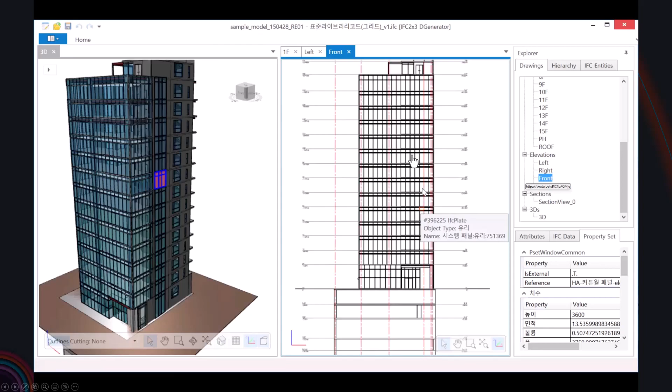I've done work with BricsCAD to think about how you would automate this in the future, such that you have view plan types—so for this floor, make 15 kinds of drawings and help me automate their setup. Things like object replacement: instead of putting the 2D representation of a fire extinguisher directly, everybody realizes that in a life safety plan a fire extinguisher is a symbol, or especially in an egress plan near an elevator it's super abstract. Don't put that in the content, make that a mapping that can be held externally.

So learning from that, it's definitely possible to take a multi-representation approach. Here's a 15-story building—you'd call these the A100s in the US market, the 1/8 or 1/16 level plans. These especially should be automatable completely at this point, such that for each of these levels you can say I need this kind of reflected ceiling, I need this kind of floor plan, and generate 50 different kinds of views: life safety, power, electric, layout, and so forth.

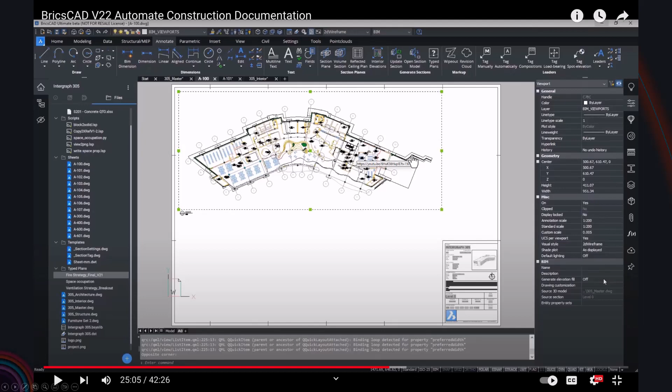Certainly not everything is perfect and automatable in the work I've done with BricsCAD, but we have other examples where people are looking at different efforts. To me, this is a really fruitful space to spend our time because it frees up where we can produce work. So if you can get data into a standard format, you can work in any number of tools.

So this is another example from Graebert. They're making a set of tools that do drawing automation out of Revit and IFC. This happens to be IFC, but basically a BIM sort of drawing approach where the drawings are abstracted from the model, but you're not making dumb drawings. You're making data-rich entities that are linked back to the drawing representation, which is how all the major BIM tools work today.

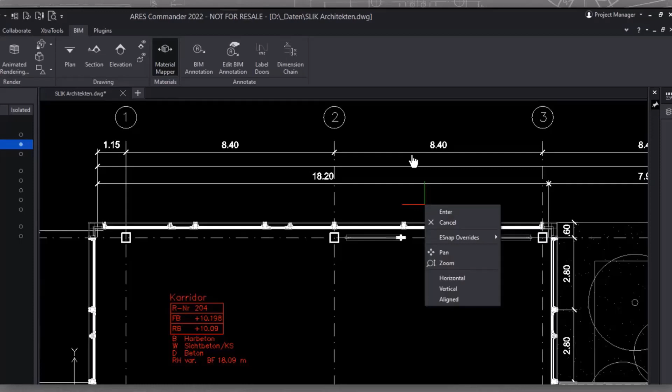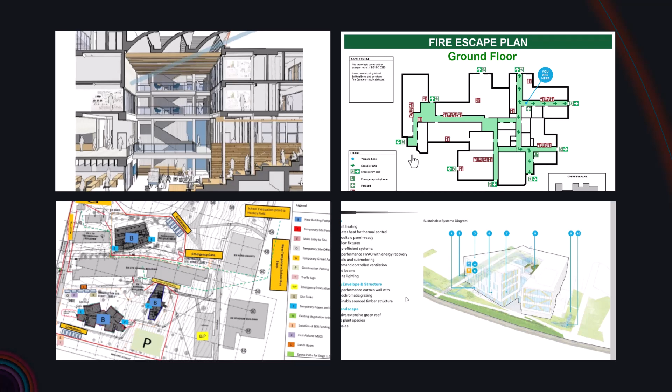As we do this, we should think about it - I use the word drawings, some people like the word views, graphics, 2D overlays. I think everything you see on the screen is an example of something that should be part of this discussion.

Assemble data, make views of it, and make it representational. I like to think about it as free, meaning automated, such that if you make rich data in a model, you can get good drawings for free. It's also instructive to think about how we handle rendering today. Some tools render in the application, but the most robust and dedicated tools for visualization or rendering, live or not, are actually separate. I think this is a very good corollary to this problem.

Drawing automation is a pretty big deal, and if somebody focused just on that, and less on having to focus on all the modeling tools or specialty modeling tools, you could make some really interesting innovations there. It basically means that all the content that comes out of our existing and new applications will just feed into that process.

So you could replace, in this kind of drawing, toilet fixtures with a manufactured fixture, or some other representation for a plumbing drawing. A rule-based approach would definitely be the way I look at seeing this getting solved, and actually being part of the opening up the market project.

So there's a bunch of other big picture stuff that's important when you start to look ahead. I'll say this is the place I've spent the least time lately, but at the same time I have spent time on it over the last couple of years. It's a grab bag of stuff that I see we don't address well in the industry, which is linked to this big picture topic of opening up the data.

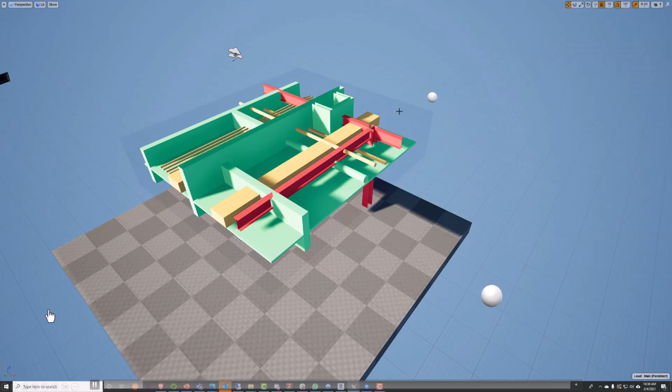And then just from a user experience standpoint, are there areas that we're not innovating around just basic model representation?

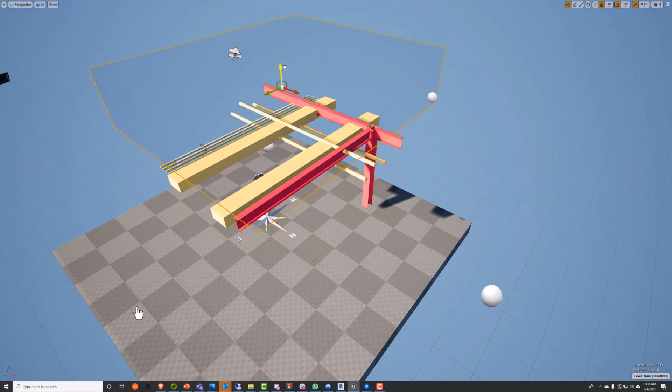So why don't we have a slicer that's sliced by system? What this is basically showing is you section a model, but only section the system you want to look at, not the key things. So again, these are experiments around understanding: are there gaps in the tooling that we have today?

And then some very obtuse stuff, but if you haven't figured out, I'm a nerd when it comes to this sort of stuff and go pretty deep. I think long term we want to start to think about what's called a DSL, a domain-specific language. I'm not saying this is a requirement, I'm just saying there are some fans of this concept in the industry.

The idea here is you have a way to provide the descriptive components of the world on top of the data representations. I have this old mock-up I made called Bill, which was like a scripted programming language — we've actually done some prototypes of this. The idea is you could think about requirements as scripted things, and the words in here actually take on meaning. To me, this is the most important aspect of thinking about this.

This little thing is supposed to say: let me go into a data set and set the floor-to-floor equal to 15 feet. That's a very understandable thing, but for a computer to do that automatically, you have to think about what floor-to-floor actually means. Is that top of finish to bottom of steel, let's say, in that building type? This level of specificity we don't have at all.